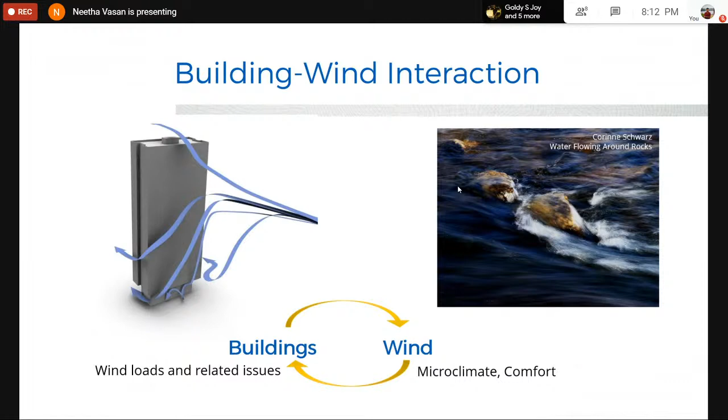Wind applies force on buildings and creates wind-induced structural and cladding loads and other related effects. In turn, buildings alter wind flow from its otherwise unobstructed path, quite like water flowing around rocks. This interaction affects microclimate, the climatic conditions close to the ground and right around us and around the buildings themselves.

So let me give you an introduction to some general wind flow mechanisms that we come across on pretty much all building projects, in one form or one level of severity or the other. When wind is obstructed by a structure such as a building, it will find the path of least resistance to continue along its way. In this process, it will flow around buildings or any obstruction, and it'll create high wind activity zones around the building.

So anywhere you have a corner, typically a sharp corner like around the building, those are regions where winds would be moving faster than usual, or faster than somewhere else along the streamline. This sort of flow pattern is called downwashing.

Some of this flow also moves upwards and over the building, and that would cause wind accelerations and high forces at the edge of the roof. So these are the kind of flows we'd have to look at if there were rooftop structures like solar panels or a pool. Very tall buildings sometimes have pools and decks and outdoor restaurants up there, so those are the kind of flows that would affect that region.

Now, the majority of the flow is directed downwards and around the building, and that's typically where the highest wind activity would be seen. This effect, the downward flow and flowing around, could be intensified if a short building is located right behind - or when I say behind, I mean upwind, as in upwind, before the building, relative to the direction in which winds are approaching. In that kind of scenario, this downwashing, the intensity of flows down below can be increased or exaggerated.

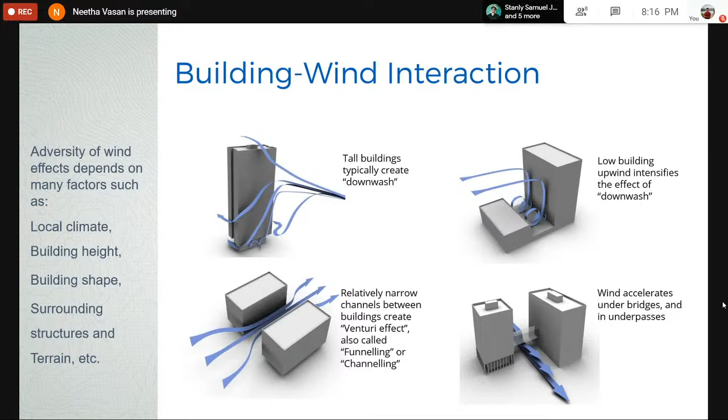So, like the poem said, wind can be a friend or a foe. Now, who doesn't like a nice, good breeze on the beach or just outside in a park? It's always nice, especially when we're in a warm climate, right? When it's a warm, humid climate, a breeze is always nice to feel comfortable.

Winds are also helpful when it comes to sports activities, like water sports or paragliding or other similar activities. Wind is also important for air flight operations, and obviously it's important in windmills, because that's all people know about wind engineering, unfortunately or fortunately.

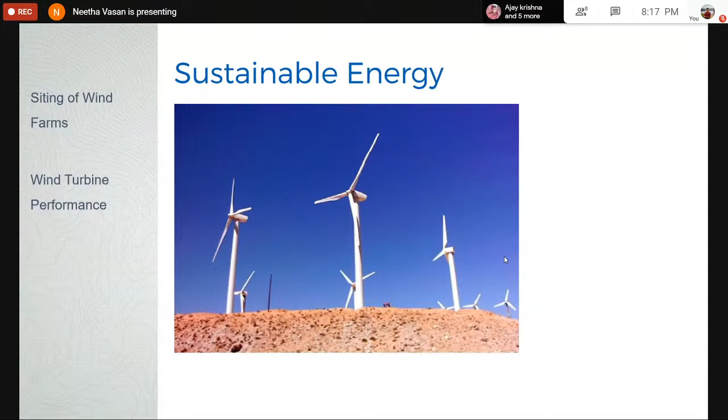But winds can also be problematic. One of the simplest issues is too much wind being a nuisance, especially extremely strong winds that don't happen every day but maybe once or twice a year. Maybe you have a rainstorm or just a particularly windy day, and in general those kinds of events can cause inconveniences to people.

This may look like a simple inconvenience, and that's okay for us. But when it comes to extremely expensive projects, like a high-profile, multi-million-dollar hotel where VIPs have their business meetings or parties, even these little inconveniences can be a big issue.

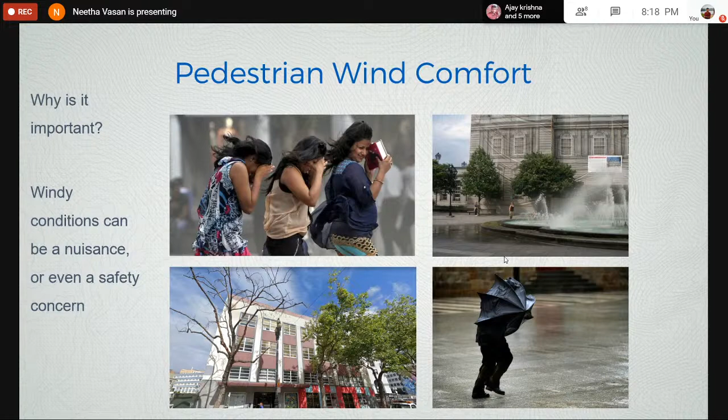Too much wind, like I said, could also cause actually dangerous situations. This is a video playing, and you'll see it's already a windy day, considering how the tree leaves were blowing, and then you have this temporary wall structure topple over onto people.

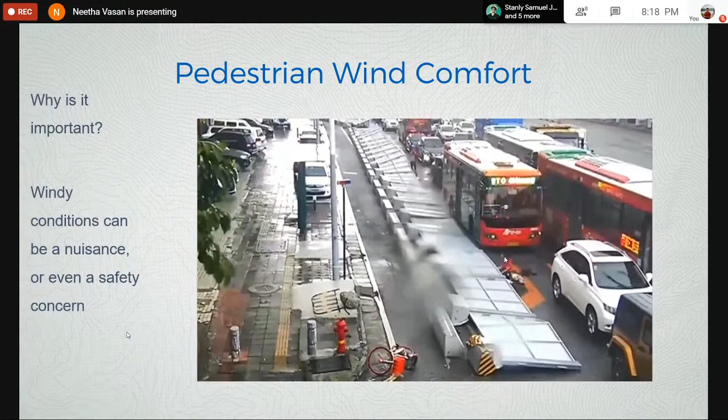These are extremely dangerous situations that ideally shouldn't happen. If the wall, even though it was temporary, had been designed with awareness of the kind of wind flows that could occur there, maybe other precautions or more reinforcement might have been used.

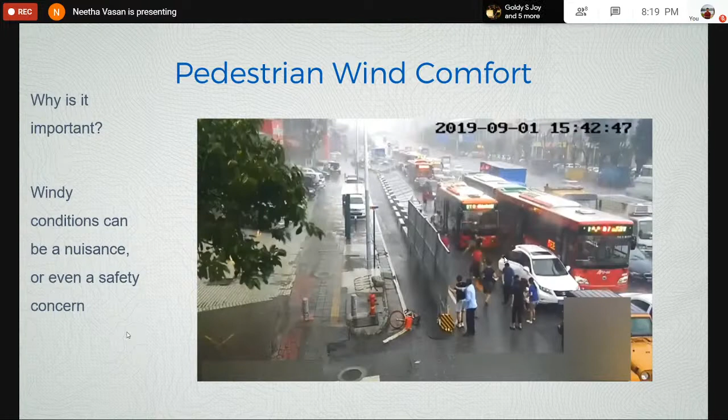Now, with respect to that video, as you see, people were rescued. They sustained only minor injuries, and even the child who was there was okay. So in the end, good news.

Now on the opposite end of the spectrum, even too little wind, especially in hot climates, can be uncomfortable. Not only is it unfavorable with respect to the heat, like in the Middle East or maybe even Delhi, where you have extreme heat with very low humidity, it could be a huge problem, and people are looking to get some sort of breeze.

When you have a lot of buildings or structures, and as modern urbanization keeps growing, you'll see more and more tall buildings. Right now if you look at Mumbai or Delhi, every day there's a new high-rise project coming up. So even though things are okay now, more buildings can come up and restrict wind flow amongst those buildings even further. Those are situations where too little wind can be problematic.

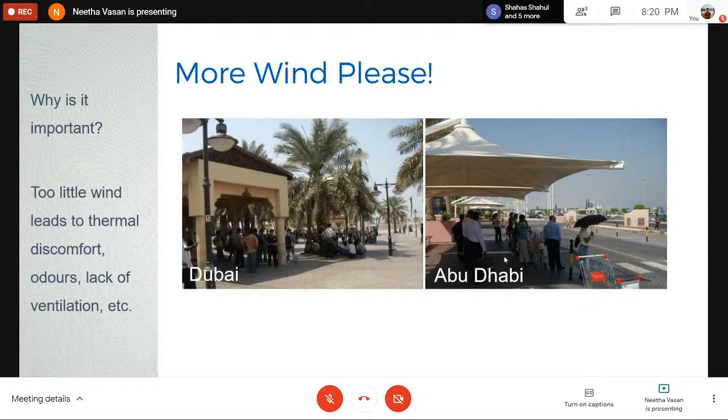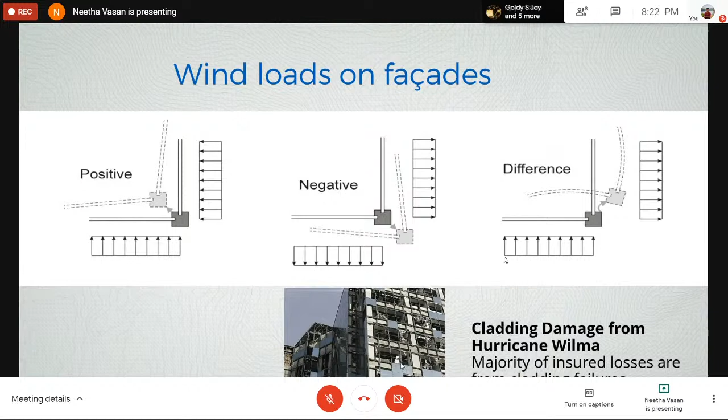This was a building that was not under construction, but fully clad with glass, and during a hurricane event a lot of that glass broke. After that, they started construction once again.

Yet another area where wind is an important factor is structural loading. We learn about dead loads and live loads, and static and dynamic loads. Wind is one of the natural dynamic loading sources we'll come across, and probably any senior students attending this webinar might be familiar with the IS 875 code, part 3, which talks about wind engineering and wind loading.

Now, codes have to be very conservative, because you can't have documentation for every possible design scenario. There are situations when you have complicated building designs, not simple structures, and that's when the code may be overly conservative, so you might have to look at experimental approaches to get a more optimal, cost-effective design.

So back to structural loading, wind, as I said before, applies a force on buildings, and it could be shear forces, overturning moments, or torsional moments. All of these need to be considered when building a tall building, typically.

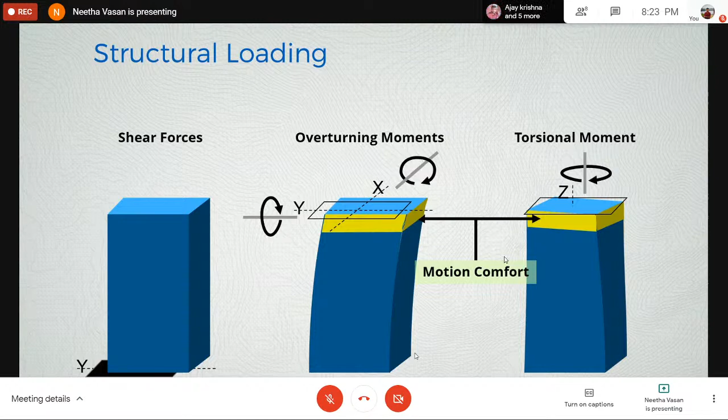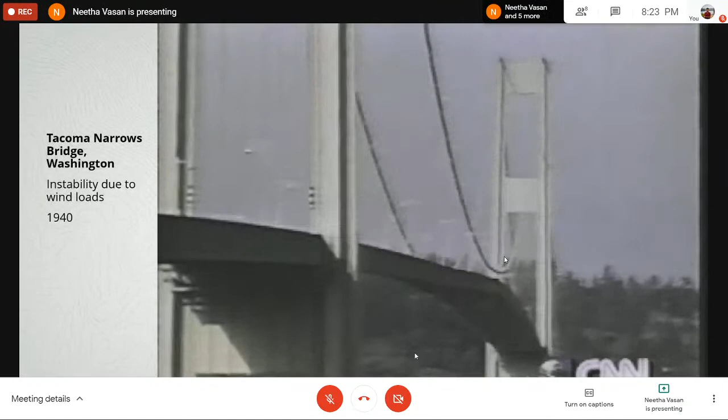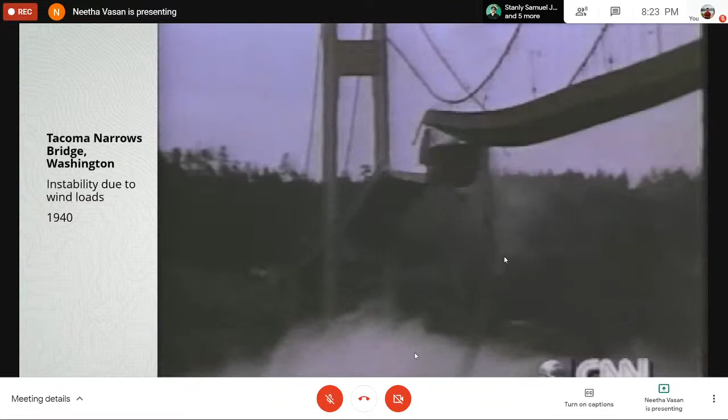I know you can't hear the audio too much, but I'll explain what this is. This is Tacoma Narrows Bridge in Washington. This was an event that happened in 1940. The bridge basically fluctuated, shaking like a ribbon, and then it fell apart. No one was hurt, because there was a good amount of warning. People knew that this was going to happen. Engineers knew just before it did, and so the road was cleared. All precautions were taken. It happened because it was one of the earliest recorded failures due to wind.

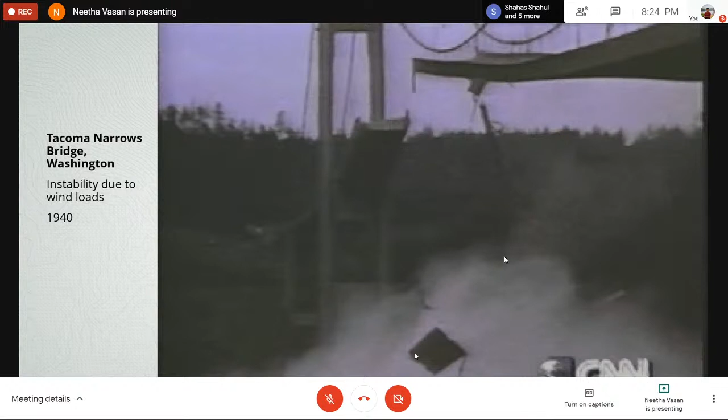So as you can see, I'm listing a number of problems that can be associated with wind. We also, in some occasions, have to, depending on the area, depending on the situation, and depending on what region you're in and how windy it could be, look at vehicle stability.

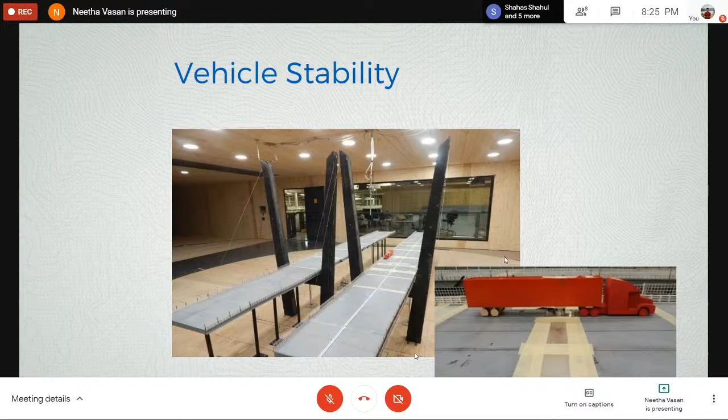So large container trucks like these going on bridges in the mountains, or in bridges above a wide river, those kind of situations, there's always a possibility that if we're not careful or not aware of the wind conditions in the area, such large vehicles with large surface area can be toppled over easily, because there's a large area for wind to apply a strong force on.

Exhaust reentrainment. Now, building exhausts are not something that's commonly looked at. Structural, cladding and comfort issues get looked at even more commonly among all of the areas I'm going to talk about today. Exhaust may be important, more so in, say, healthcare buildings or labs, where that exhaust pollutants and unhealthy fumes that people don't want to inhale affects the air quality around the area. That's something we look at a lot of the times.

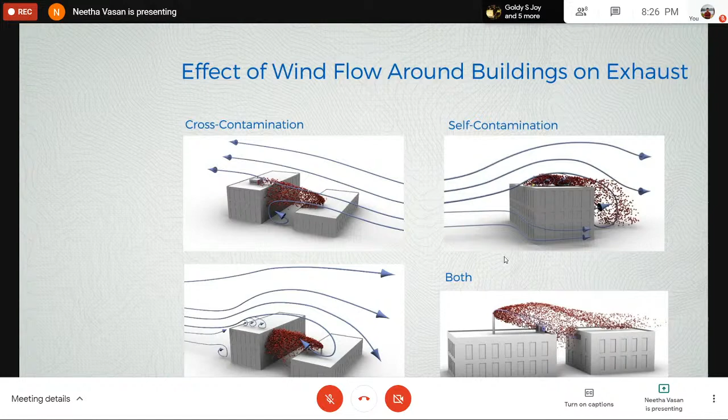Now, these figures show wind direction, and the red particles are how exhaust fumes are modeled. These are just some scenarios showing how exhaust from one building, over here on the top left, can be entrained into another building if the wind direction is unfavorable. For humans, it's unfavorable if this happens, or it could be self-contamination, where the exhaust from the building gets back into the building through the windows on the opposite side, or both, a combination of both.

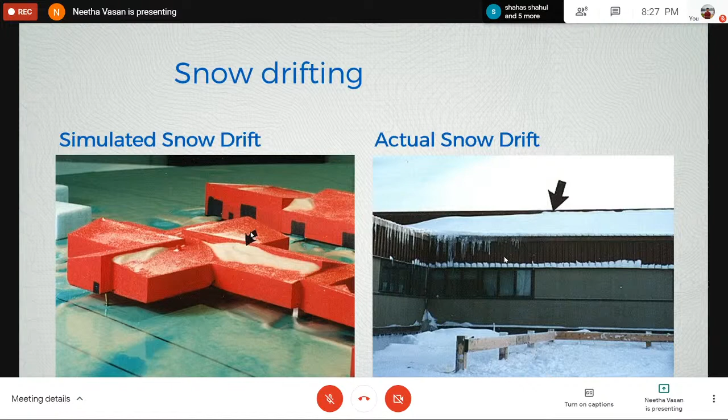Sand infiltration could damage the functioning and affect the operating of these tracks, and even roads. Depending on the amount of sand that gets deposited on the roads, it could render the area unusable, which again causes cost and time problems.

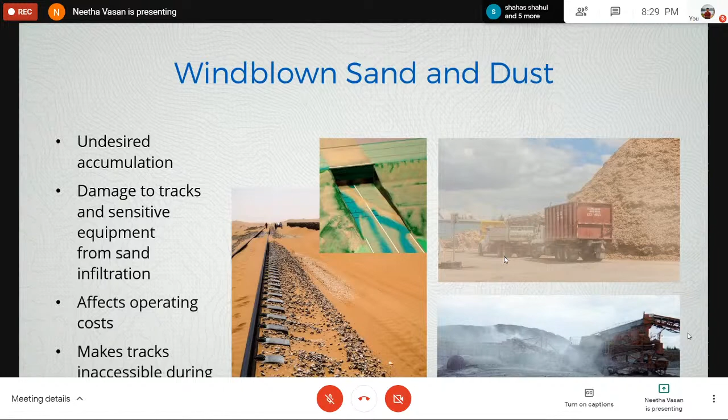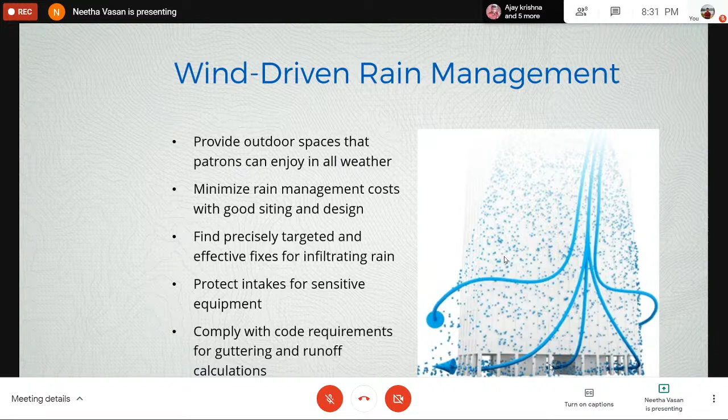Some of these issues may seem silly considering we're in a place that gets a lot of rain. But when it comes to multi-million-dollar projects like a hotel or business center, any little factor that causes inconvenience to guests means a loss in sales. That's a loss for the investors or owners of the project. So when project costs are high, losses and savings can be proportionally high, of the order of millions. That's why we see these kinds of projects come to us, and there's science and research that has gone into trying to solve these problems.

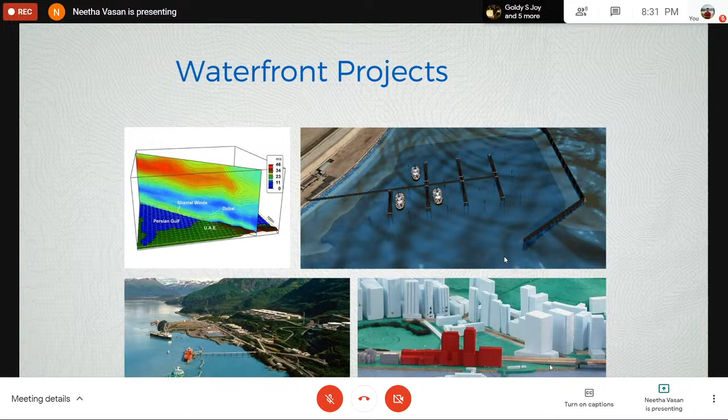Of course, the problems aren't common all across the world, it varies from place to place. This is an example of waterfront projects, so you'd have to look at winds near waterfront projects, because sometimes it could be for a harbor design or a port design. Basically, wind creates waves and affects sailing and berthing of boats and ships, so that all comes into factor, and sometimes we have to look at these kinds of issues too.

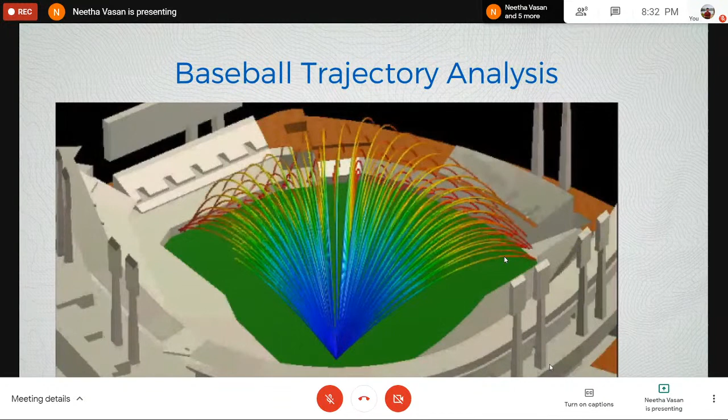Baseball or ball trajectory is another area we often look at. It need not be baseball, it could be another sports field. Basically, how would ball trajectory be affected considering the wind in the area? It may not be a big issue in low wind climates, but in places like Chicago or Texas, they have a lot of stadiums and games, and this could be an issue there. So sometimes it's just proactive design, people want to do a good job and make sure they're designing a project, especially when investing so much money into it. They want to make sure they're creating a project that won't face too many issues that may be difficult to solve later on.

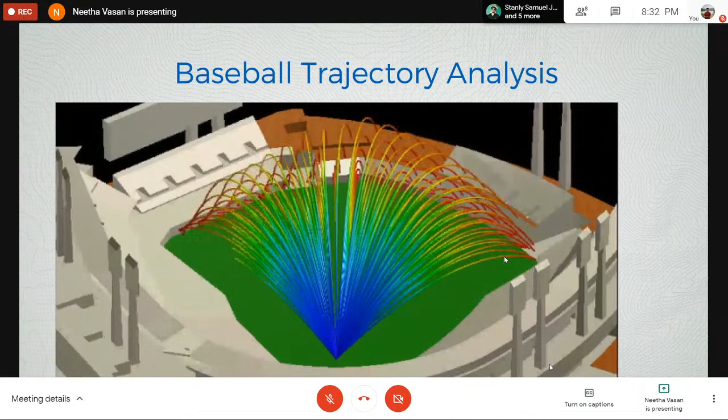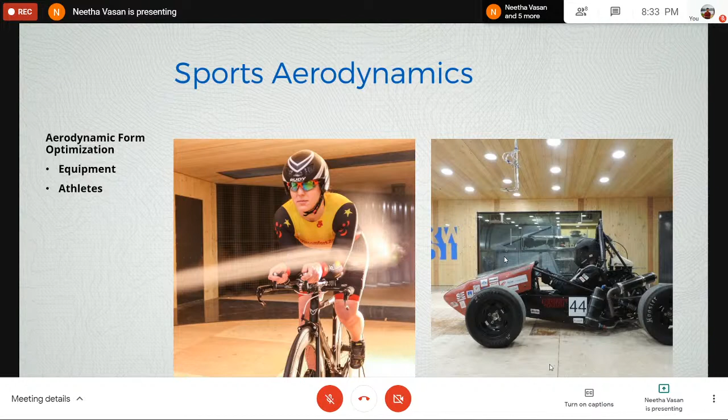So, sports aerodynamics. If you're in the mechanical engineering field, or even civil, any engineering field, you may already be familiar with race cars and even commercial cars being tested in a wind tunnel for their efficiency, their streamlines, or their dynamic property in wind. Now, athletes and vehicles, especially in sports, move against wind, or even otherwise have to position their bodies or design vehicles to be as streamlined as possible to move with the least possible air resistance. So knowledge of airflow and fluid dynamics, and especially local weather and climate, plays a big role in such projects. We often see a lot of unique projects with unique problems too.

So strange issues, unique projects, that's what they are. And believe it or not, we have actually been asked to look at parade balloons.

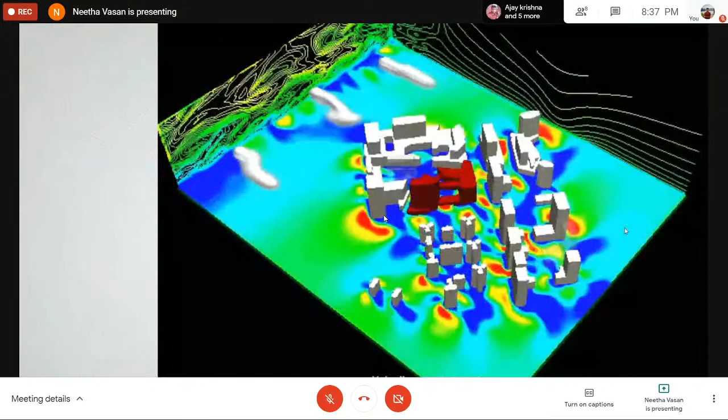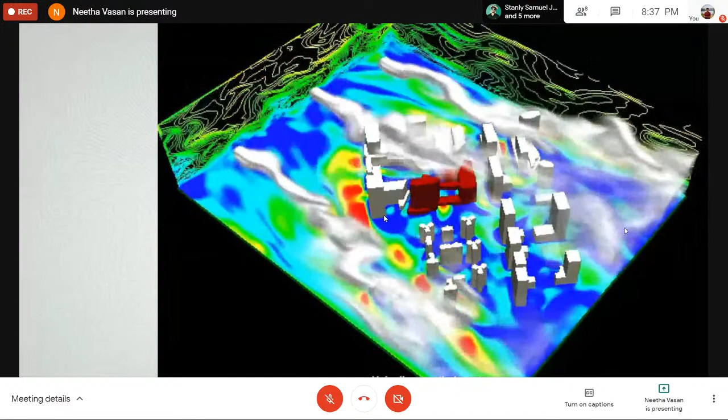When all these studies come together, sometimes we get huge master plan projects where a client or city is developing a large area with many buildings. They want to be proactive, especially in a high wind area, to make sure wind doesn't flow around, through, or between buildings in a way that creates bad or unfavorable wind conditions. In this animation, blue and green represent lower wind speeds appropriate for streets and sidewalks, yellows are tolerable, but red zones are not good—we want as few red zones as possible, and if any exist, they should be far from where people walk.

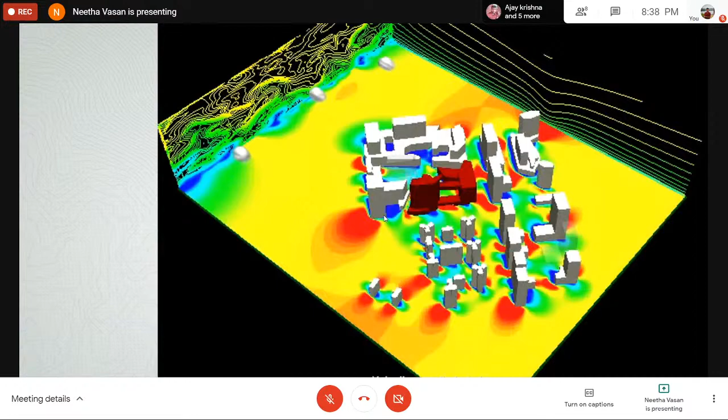In this animation, you'll see that right around the tall buildings is where those red zones are biggest. Within the cluster of buildings, things are a lot calmer, but there are small local areas even within that large cluster that could get pretty windy.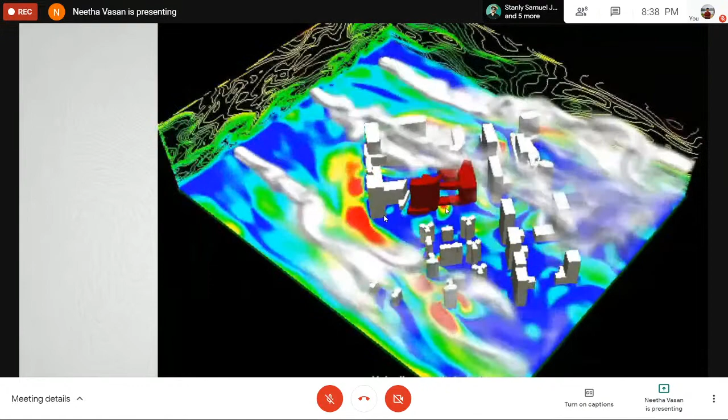People also want to make sure, especially in a low wind climate area with a lot of high-rise buildings coming up, that the cluster or development isn't designed in a way that restricts wind flow into the area. Especially in hot climates where natural ventilation is wanted for sustainable, cost-efficient design, no wind or low wind is also a problem, like I said before. So that was master planning.

Now, we know there are all of these different types of problems that can come up. How can we assess them? How is it done?

Now, the study and manipulation of the behavior of wind around anything, like the environment, people, natural and built structures - that's basically wind engineering. And because you're dealing with wind, obviously you'd have to look at the weather or climatic conditions.

Climate data is what you want to look at. I keep saying weather and climate in the same sentence, but weather is what's happening now or over a very short duration of time, while climate is what happens over a long duration of time. So you could say the weather today is cloudy, it's going to rain, but the climate in Trivandrum is usually warm, and it rains several times a year. So long-term effects are called climate, and weather is short-term - today, tomorrow, yesterday.

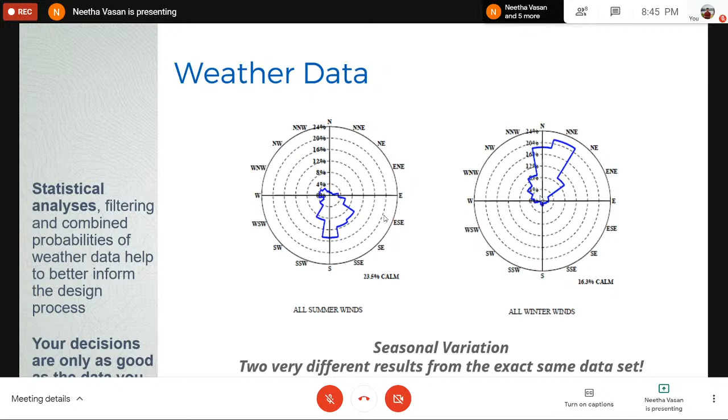So that was seasonal variation in winds. Now, winds could also just vary in terms of where strong winds approach from. So this wind rose shows all of the winds approaching this particular airport, and then we filtered out winds with speeds higher than 20 miles per hour. These are considered strong winds that have the potential of creating undesirable, uncomfortable, or even potentially unsafe conditions, depending on the building design.

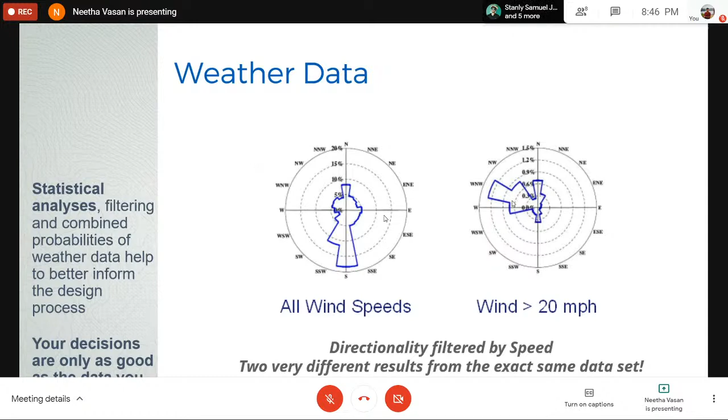We see that one would like to download wind data or wind roses from a reliable source, and you'd see most of the wind speeds are coming from the south. So it's easy to be misled to design for that information. However, only a knowledgeable person, someone who knows this possibility and has experience in the wind engineering field, would know how to filter out that data and look at strong winds, and consider that in your design also as appropriate.

Yet another wind rose I'd like to show you. So we saw seasonal differences, we saw differences in directionality based on wind speeds. But here's another example where wind directions are actually varying within a single day. This is actually in the Middle East, at an airport located very close to the ocean. Land breeze and sea breeze — I'm sure you're familiar with the concept — that's what's causing these differences.

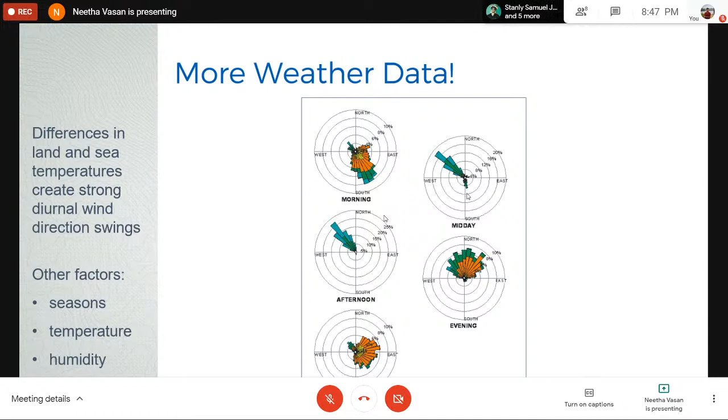So if someone were not to filter the data and check all of these things, it's easy to assume that if you combine all of this information, you'll probably see that most of the winds are coming from one single quadrant, let's say the north direction, but then it changes throughout the day. So these are just some things that we, as wind engineers, have to look at and be aware of before diving into a project. Once we have the wind data, we can then look at how we approach this project, depending on what is at stake or what your problem is.

So I'll go across a few common methods or methodologies that we use to assess wind projects. The first one I'll talk about is a desktop or design review. Now these are very high level assessment tasks where sometimes you don't even have an actual physical model of the building.

You're just looking at drawings, maybe a 3D model or photos of the building, or sometimes even looking at the building in person — maybe it's an existing building with a problem. You either go to the building to inspect it and see what's going on based on your client's complaints, or you have drawings of a building that is to be constructed, but they're anticipating issues or just want to do a good job and see if there will be any wind issues. Then you basically look at the drawings and give your opinions of what things might be like, your predictions and assessment of what things might be like around the project.

Now, this is only done by highly experienced wind engineers, because it's not easy to take a guess at what can happen. You'd have to have a certain amount of experience, a certain amount of involvement, have had to see many different cases to be able to easily look at something and diagnose it, basically. So it's something like a doctor for buildings, I want to say.

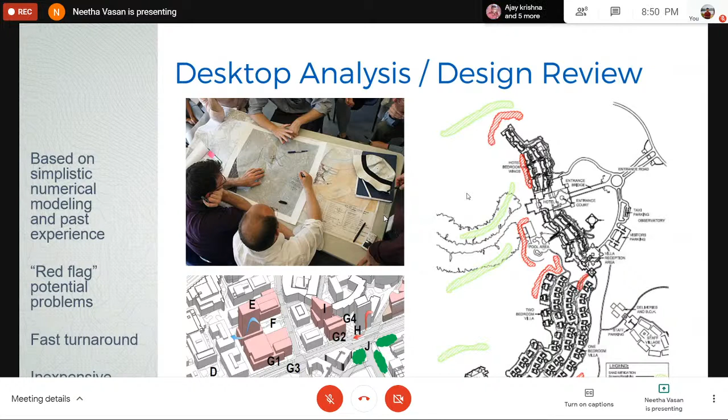So that was desktop assessments and design reviews, and they're typically very quick. They are cheaper because there's technical effort involved, but no modeling or lab required. So the resources required to do this kind of assessment are low — again, low cost.

But a desktop assessment also only answers very simple problems or gives simple guidance. Sometimes the end result, or the report for a desktop review or design review, could say: I think there are going to be complicated problems with this building, you should do more advanced tests and advanced assessments. So that can happen also — basically, it's an advice-giving stage.

Numerical modeling is just the next step, where we would use a computer-assisted model or a simple numerical program coded into BASIC or an Excel macro — a simplistic way of using equations and establishing relationships between wind and buildings and other structures to come to a conclusion about the potential wind effects around the project.

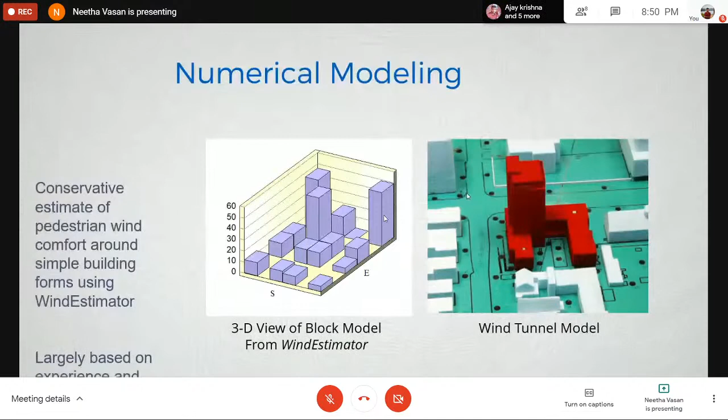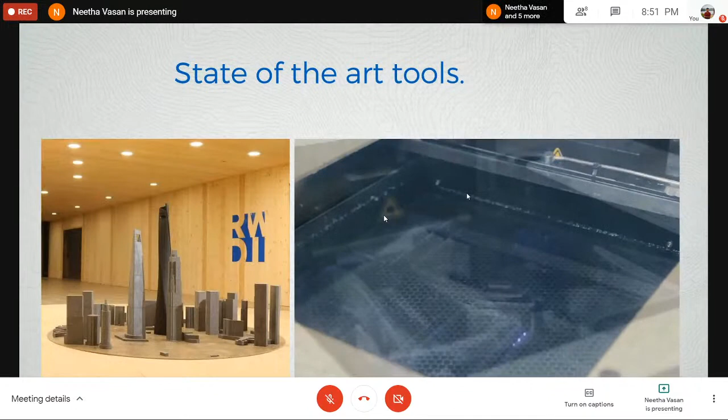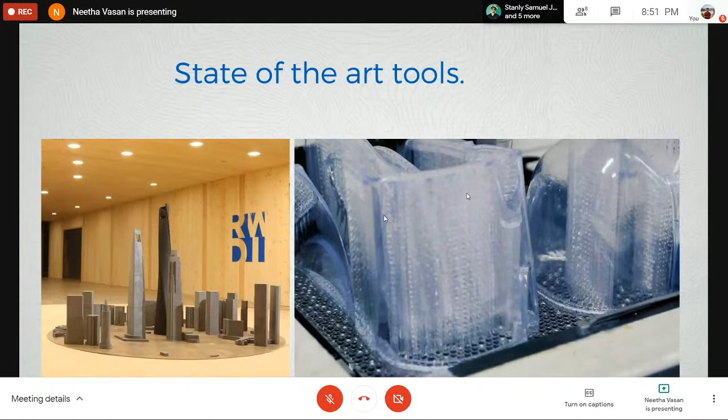The more extensive work is typically done in a wind tunnel. Now, I've mentioned this word quite a few times. The video you're seeing here is of an SLA, or stereolithographic machine, that is creating or molding the model for us. It's based on CAD programs, 3D modeling programs, where the building is drawn and modeled, and then the information is fed into this machine, and the machine creates a model for us.

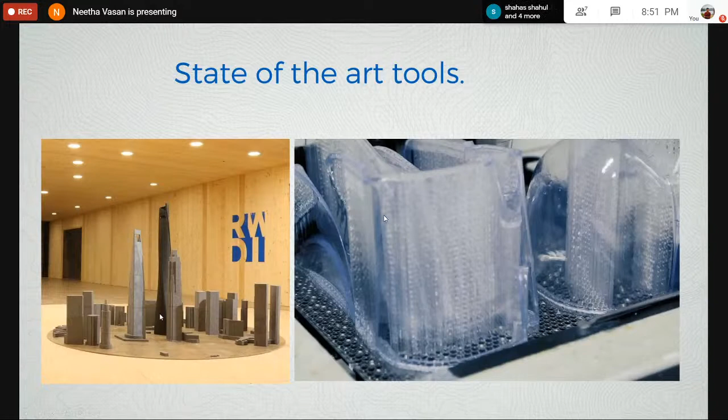That's usually an expensive process - kind of like 3D printing, but not exactly. So you typically use it for the study building or the focus building, the subject building in the project, for example, the one right at the center of this disk. Once you have a central building or the focus building of the project, you also have to model the surrounding features, features that are surrounding that proposed site.

Now, this building doesn't exist. When you're doing a project, this is probably a project that is going to be proposed. So you model that, put it on the location where it will be, and then you also model the existing features surrounding it to a certain distance.

Now, this is called a turntable. Within this entire containment, it is a wind tunnel. I'll show you another photo in a bit. This disk where all the model is sitting is called a turntable because the darker wood part, not the lighter part, but the disk itself can rotate. It needs to rotate because we need to blow air and basically simulate wind and blow it at this model. We need to understand how the building and the surroundings and how wind itself around the building will behave when wind blows from this direction, that direction, basically all around the compass. That's why it's called a turntable, and it rotates.

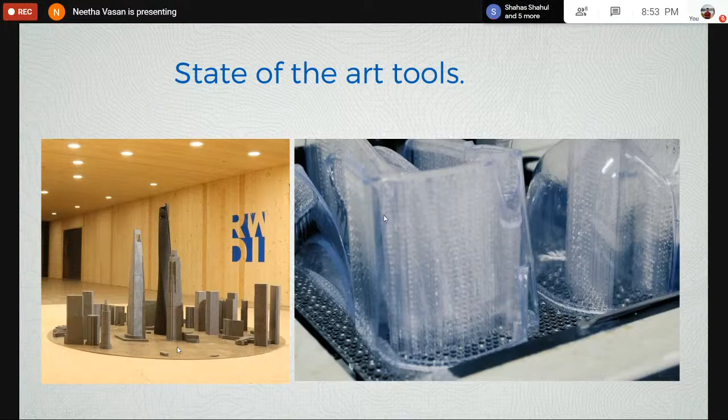Now, it is also important, it's not enough to just blow air at a disk. It is also important to simulate all the properties of wind that one would see in real life on the actual site in real world conditions. I promise not to go into too much technical detail, but if anyone wants to know more about this, I can definitely give you answers at a later point.

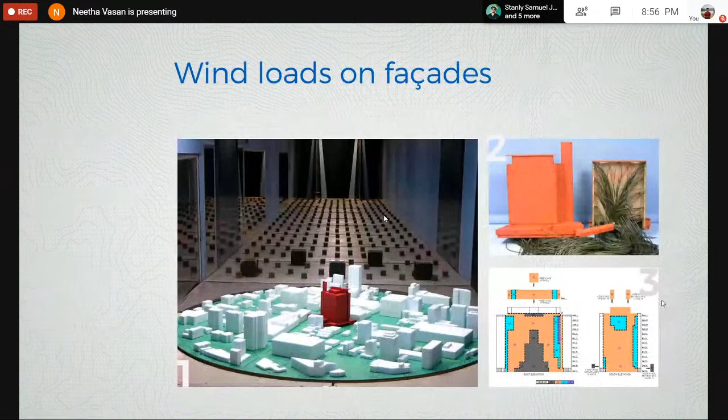And that's usually used to assess comfort of people. Are people going to be comfortable around a building? Is the building going to redirect winds in a way that it would get so complicated and so windy that it would be a nuisance for people? That's the sort of answers that we're trying to provide through this test.

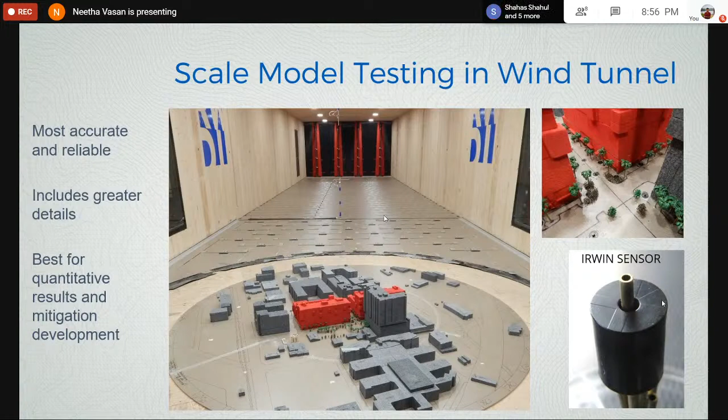This is a photo of one of our wind tunnels. A wind tunnel is a long channel, a mechanical tool with high-powered fans that blow air towards a model. So basically, it's a big box, a long tube - you can call it however you want - and there are fans at the back end of it.

Some wind tunnels are designed so that when the fans rotate, wind blows towards the building. Others are designed so that the fans suck wind in. Depending on how it works, you have to understand how to assess the building. When it blows, you can say that's the direction from which wind approaches. But when it sucks in the wind, it'll be the opposite - wind would actually be approaching from that direction.

So this is one of our wind tunnels, just wanted to show you an example. I'm giving you very brief details right now, but I can answer any questions at the end.

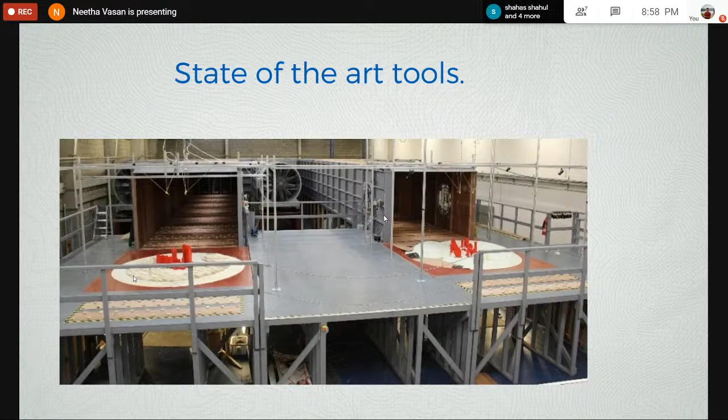The wind tunnels are designed so that the air or wind reaching the disk has all the relevant characteristics of wind that naturally occurs at the site in the real world. The pressure and speed data obtained from the wind tunnel is then combined with meteorological data, that is wind data collected from the airport. This combination is analyzed to help get answers to the problems we're facing.

Water flumes are especially useful when we want to look at particle transport, like the sand and snow transport examples I showed you earlier. Imagine if we were to do a sand or particle study in a wind tunnel - it would just fly everywhere without a way to control it. So we need a contained system in which we can observe the movement and deposit of particles. The working idea here is similar to a wind tunnel: particles and flow come in from one end, go around the building, and...

Water is also a fluid, so there are ways to model and translate this motion into how air would behave around buildings. The difference here is that the medium is water, not air.

So those were experimental devices or tools that we would use to assess and measure wind around buildings.

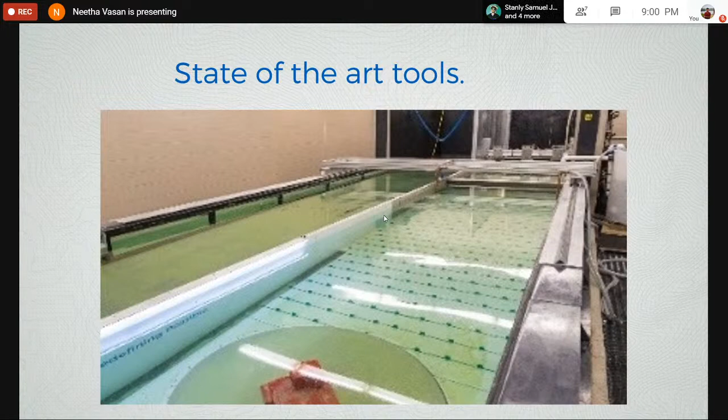We also have CFD, computational fluid dynamics, which is an established tool in the industry for urban wind modeling, and some of you may be familiar with this as well. CFD techniques are used to generate a virtual wind tunnel, like we're having a virtual meeting here - a computerized wind tunnel, so to speak, where flows around the site, the wind flow around the project and the surroundings and the study building are all simulated at full scale.

In the wind tunnel, everything's scaled down to a small scale, typically 1:400 or 1:300 - a pretty small scale. With CFD, because it's on a computer, you can do it at any scale you want, and typically it's done at full 1:1 scale.

The computational domain covers the site and the surroundings - basically the entire area we're looking at - and it's divided into millions and millions of small cells. In each cell, computational calculations are performed on the flow quality, the flow pattern.

Will wind go straight or around a corner? All of these things are established through calculations. The advantage with CFD is that there are no limitations to the number of points. You know how in the wind tunnel test there were dots on the building or on the disk on the ground where instruments were installed? There's a limitation to how much you can drill a model to install these instruments, whereas in CFD there's no limitation.

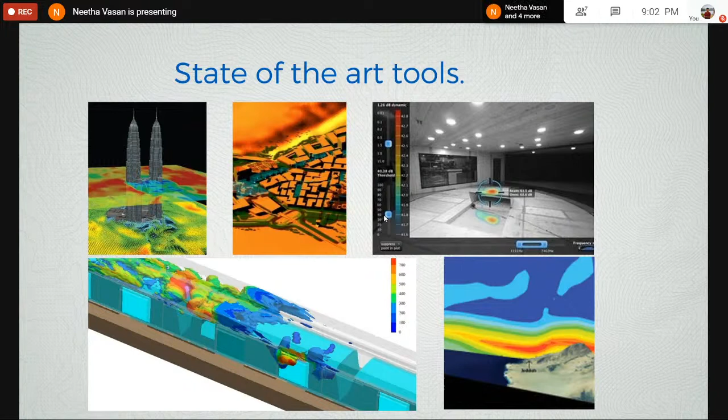CFD results are either shown as still images like a wind map, or in the form of animations like this that show a better visual of how wind moves around the building. For this reason, don't be surprised if some people call it colorful flow diagrams instead of computational fluid dynamics.

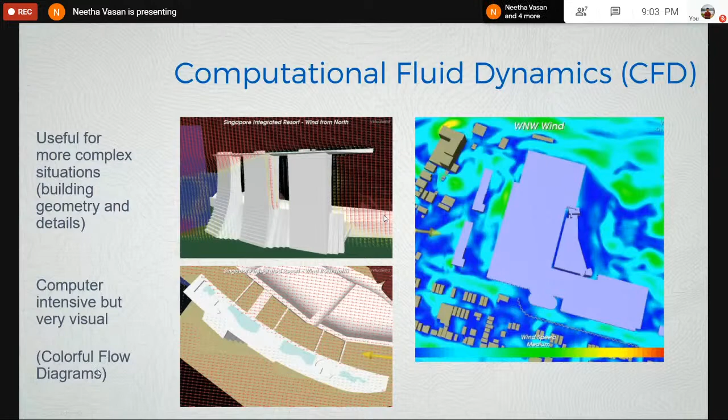And the last method I'd like to talk about briefly is field tests, full-scale on-the-field tests. Now, as I said before, desktop reviews can be quick and dirty. It can be done with low resources and done very quickly.

Wind tunnel testing may take a lot more time because you have to build the model, and it's quite an extensive model, so there are more people involved in making it. There's people, time, and effort involved in getting the model into the wind tunnel and operating it - that's an additional resource or cost involved. And then obviously there's the engineering side of things, more assessment that goes into interpreting numbers and getting the final results. So it's a more extensive but also more accurate process.

CFD also has similar advantages, in that it's kind of in between a desktop assessment and wind tunnel modeling. For a wind tunnel model, someone has to create these models on CAD to give you an idea of what the building looks like, and then someone else has to construct them. For CFD, you stop with the computer modeling, because that's all you need to get to the analysis or simulation part of things. So it takes a little less time than wind tunnel tests, but the cost can be comparable or cheaper depending on how detailed you go into the assessment.

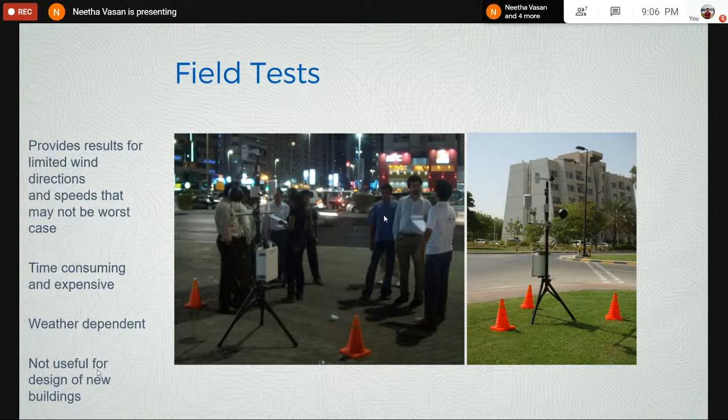Now, we talked about who, we talked about what, and now we can go to the last section of how we do wind engineering: solutions. Again, we talked about problems, how we assess them, and this last section is going to talk about what kind of solutions we recommend for some of these projects.

So these are just case studies I'd like to show you, to give you an idea of what you deal with in a wind engineering scenario. Wind-induced responses - that's basically another way to say loading. Wind loads on a building, or the building's response to wind acting around it.

I hope everyone recognizes this building. It is the Burj Khalifa, the tallest building in the world currently, and because of its height, see how slender it is at the top.

If not designed properly, almost all tall buildings have the tendency to sway like a swing, from one side to the other. Imagine this building swaying like that, and if someone were at one of the upper stories and felt that sway, unpleasant is an understatement—you don't want to experience that. So wind-induced accelerations are another issue we look at when examining tall buildings like these.

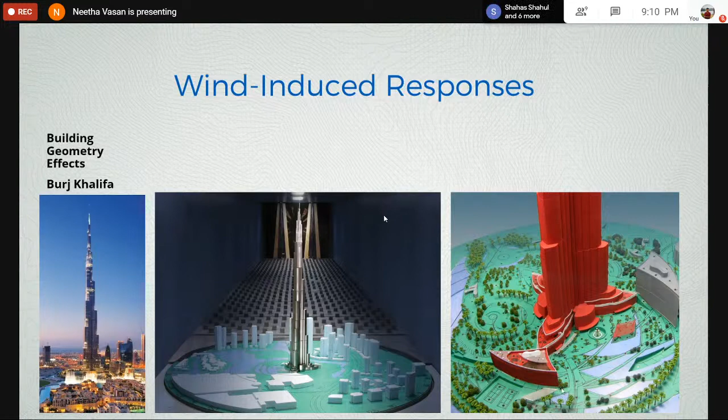Here's another example, a similar situation. This is Taipei 101, one of the tallest buildings in the world. At the time it was constructed, I think it was maybe the tallest or the second tallest back then.

This is an interesting case because this was also a very tall building in a surrounding area with very short buildings, so nothing to obstruct wind that would affect the area up there. What started out as a simple cube sort of tower ended up being notched at the corner. What seems like a simple change on the drawing board, the steps and designs like that, actually significantly decreased the wind response of the tower—that's another kind of solution we brainstorm and arrive at.

All of these past projects teach us a lesson also. So as new engineers, when we come across newer projects that may have similar issues, we learn from these past projects and take our lessons from there to apply to new projects.

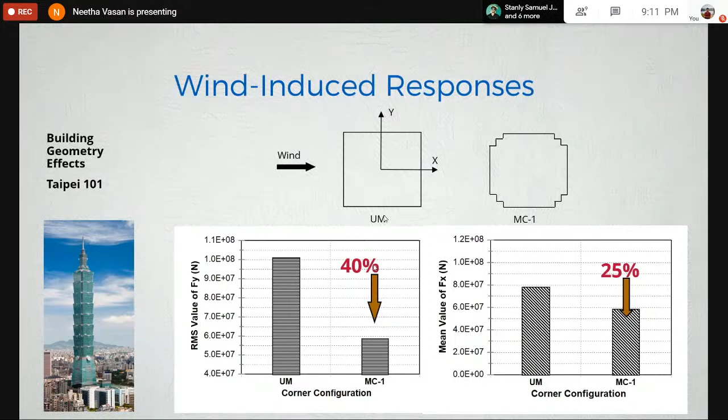Like wavy or undulating structures, in these cases we have to take a lot of wind measurements across the terrain to understand wind conditions better. It's not easy to directly take pre-recorded data from an airport and apply it to the site. You'd have to actually model the mountains around the site, put it into the wind tunnel, and take measurements on the mountains. It's more extensive—these are called topography tests, where you model the topography and establish how it affects wind flow around itself.

We're coming close to the end of the presentation. This is not the last example, but we're close, just letting you know.

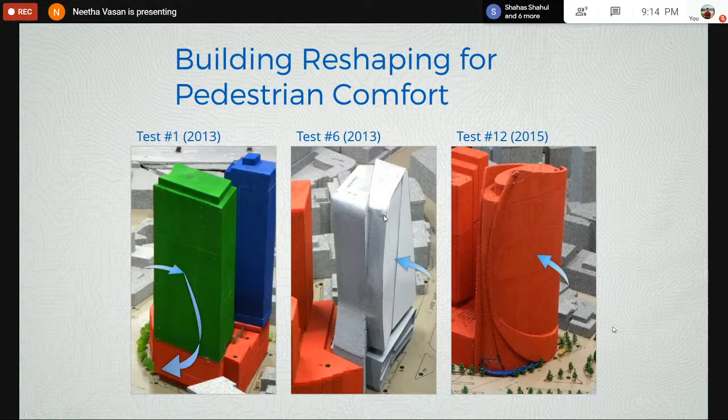Some other large-scale measures that buildings or designers adopt to ease wind flow around the base of a building are complicated steps, notches, or zigzag massing—different massing or shape design options that help confuse winds so that when they flow towards the ground or around the building, it isn't as problematic as it would be with a simple, standard rectangular building.

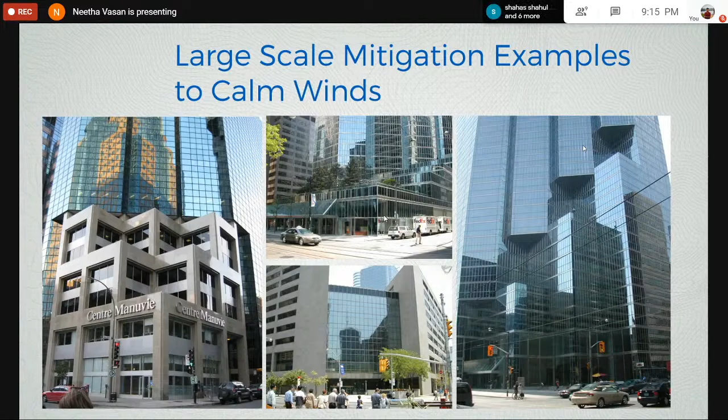Small scale measures, when problems aren't that significant, might include adding a few trees in problem areas to diffuse winds, wind screens taller than a person's height to diffuse airflow through the area, or an outdoor dining space enclosed by a canopy and glass screens on the sides. Windscreens, trees, canopies—these are small scale because they're easier to implement than an entire design change like the previous example.

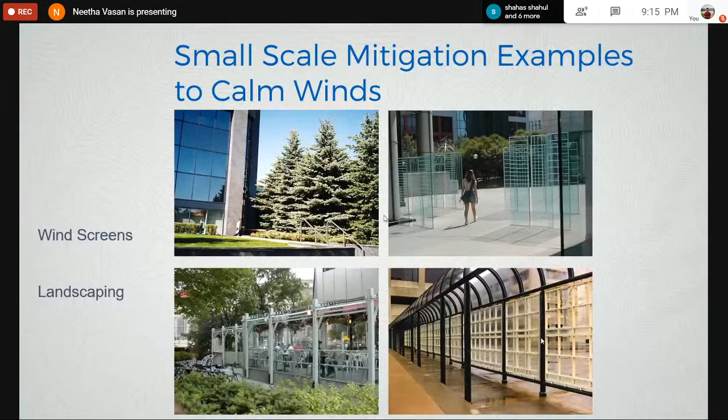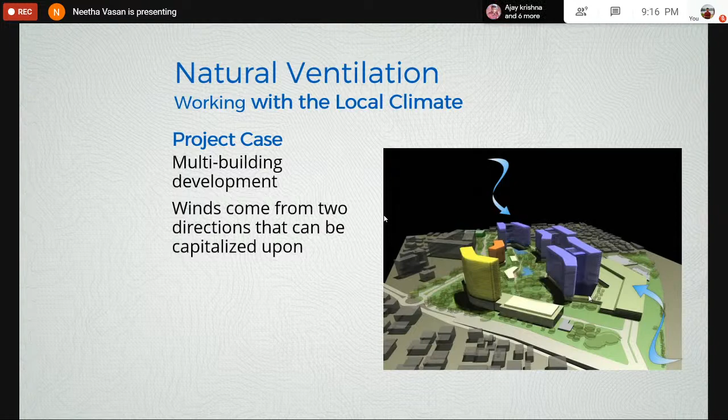Naturally, because we're in a tropical hot climate region and sustainable design is considered important, they wanted to naturally ventilate all areas in these buildings. It was a key objective, and it's sometimes difficult to attain when you're not in an extremely high wind region, or especially when many tall buildings are clustered together where one building obstructs wind to another. This is a simplistic representation of one of those buildings.

We first looked at the building form, the shape, and the arrangement of the buildings—just the general shape. All three buildings we were going to look at had a central core and two wings designed like that.

The pluses, minuses, and zeros give you a sense of air pressure as a result of air moving around the building. Zero is neutral or ambient air pressure, positive is higher than neutral, negative is lower than neutral, and there's a greater negative—two minuses means more negative than a single negative sign. Wind goes from positive to negative pressure; remember, air travels from high to low pressure zones.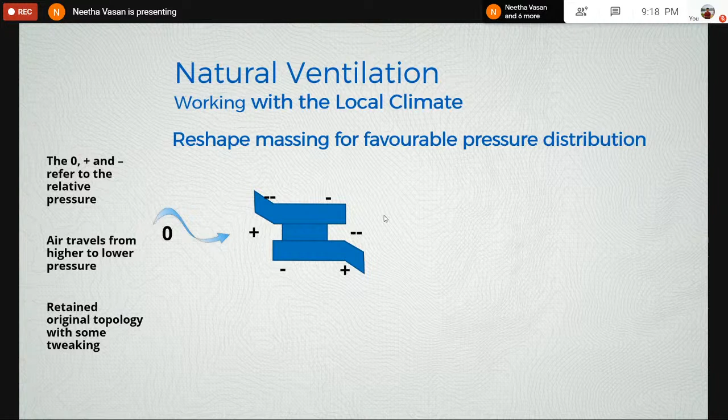Now there were 3 of these buildings to be placed on site, and how they were grouped or arranged was also going to be something to be considered. Initially it was going to be placed in a single line, so we placed the second building, and that didn't help very much because from negative to 0, basically there's no flow going from here to here, since 0 is higher than 2 negatives, right? So this building isn't getting that much wind anymore.

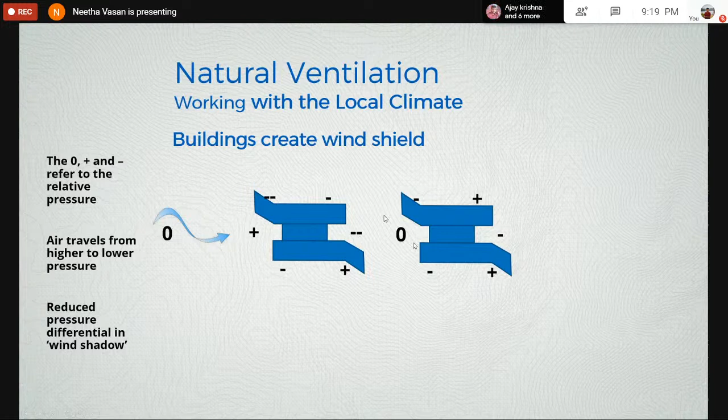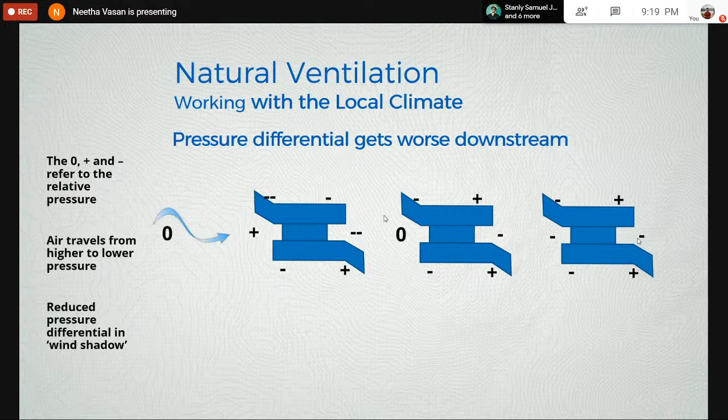We had the third one, it became worse. So the idea here was to encourage winds to get to the last building here and even to the back of that last building, so that all of the windows, if open, would be ventilated. And again, reminding you, air moves from high pressure to low pressure. So we talked to our clients and rearranged the buildings like that.

Now we proposed this arrangement, and if you compare the negatives and positives from the previous slide to the current slide, you'll see that all of the buildings are now getting a good, equal distribution of pluses and minuses. So wind can flow from positive on the upwind side to negative on the downwind side, and if windows were open on the two sides, wind would flow through it. So depending on the internal division, there could be a good amount of natural ventilation.

So now all three buildings were sufficiently exposed to winds, and the arrangement encouraged movement between them for natural ventilation, both outdoor as well as indoor.

So what would happen was that by moving this building away, we removed an obstruction that was there. This allowed wind to flow around the first building, re-engage, and then approach the next building, and flow around it. This building didn't face a problem because winds were coming from here, and there was nothing obstructing winds reaching the area. So it's interesting, the things that we have to do to get our solutions to the client.

And when it comes to wind engineering, the key is early design, because it's always easy to make a change and design your projects as you need in advance, rather than have to build it, face a problem, and then try to change it or retroactively fix something.

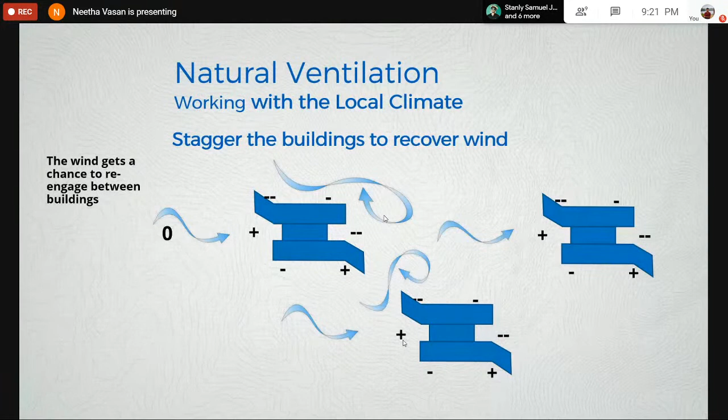So that was the end of that demonstration, and that brings me to the end of all that I had to share with you today. That was a long session, I know. Wind engineering is a niche yet vast field, and to condense it to an hour really doesn't do justice to you, but I hope you found it useful.